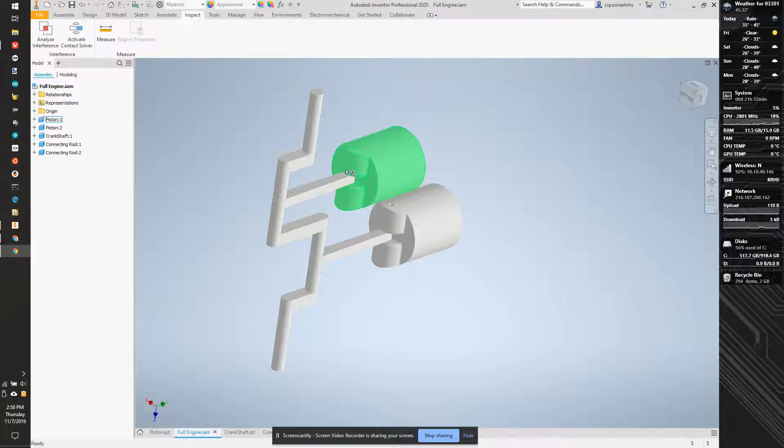So I deleted the crankcase, because once you make a part that's derived on another part, the assembly will no longer move, even if you delete the constraints locking it in place. So I can now delete that constraint I mentioned before, and let's place the crankcase back in.

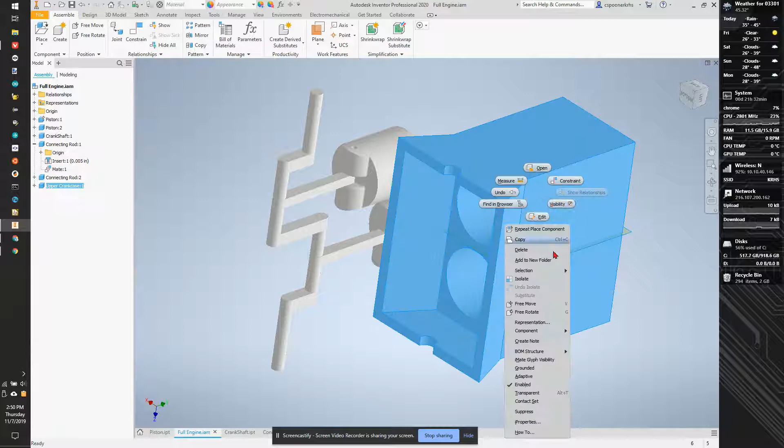I'm now going to ground this piece because it's really the part that doesn't move. I can unground the piston. And now the trick here is not grounding, not locking too much. I know for a fact that this rod gets mated to this axis.

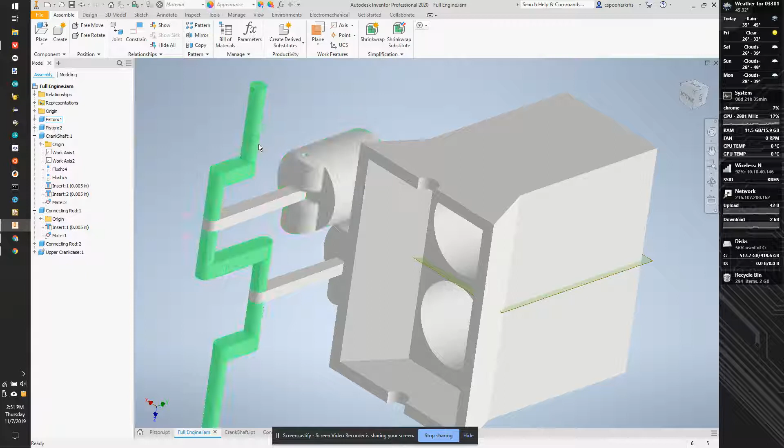Let's try that again. I'm going to mate this axis to the axis of this, and apply.

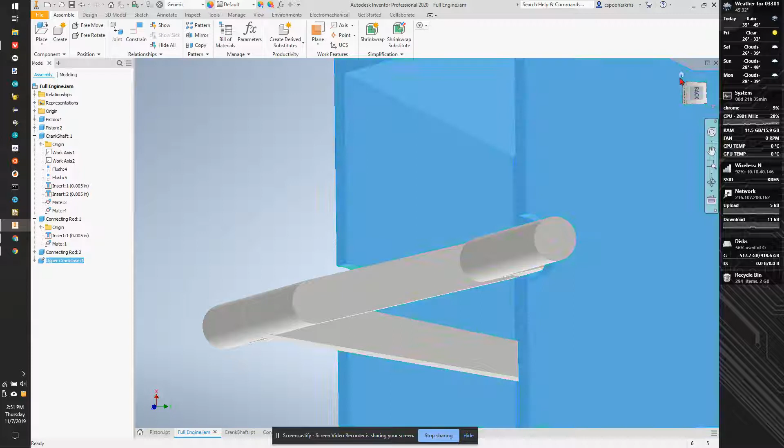Now this can move in and out, but that's going to be taken care of by locking the pistons in place. So I know this piston here gets mated to the cylinder, and we apply that. Now at this point, I should be able to spin the crankshaft and the piston should go up and down, which they do. So we are on our way to having a functioning engine.

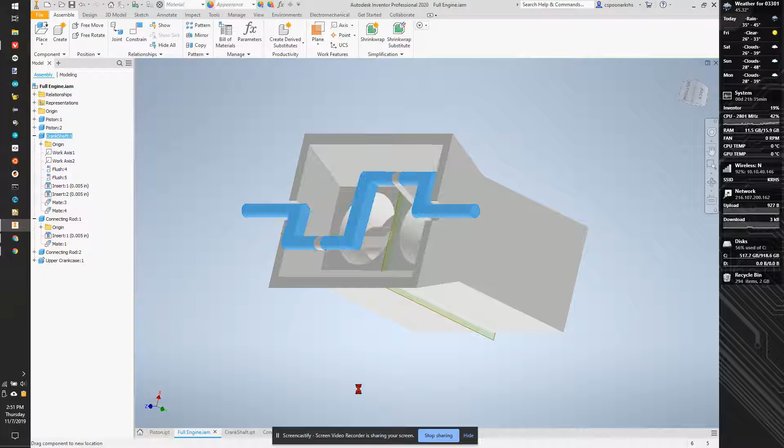Now if I look at the top of the engine while I do that, they come near the top and then come back down. Later we'll make this more complete with valves and all sorts of stuff, but right now that's pretty darn good.

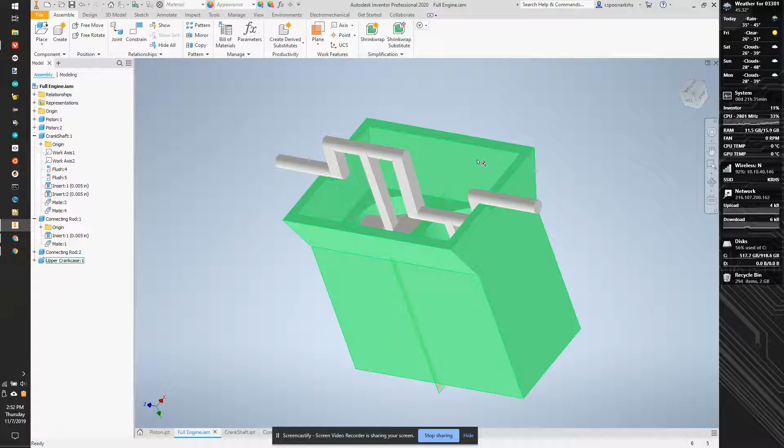Our last step before we can print this version of the engine is to add the lower crankcase and the bolts to hold it together, because we're going to screw the bottom and top together. We'll drop this in and then screw it all together, and that should lock our pieces together.

So I'm going to create a new piece. I'm going to create this also in place. It's going to be called lower crankcase.

And I'm going to start that on the... nope. Let's try that again. Lower crankcase.

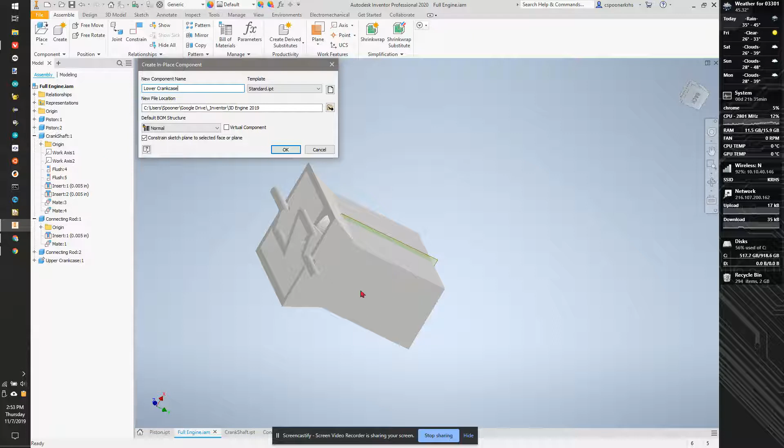Starting on the outside face here. I'm going to pause this for a moment - sorry for that small interruption, but that should sound okay for you guys. If it sounds weird, I apologize, I'll fix it after this video if need be.

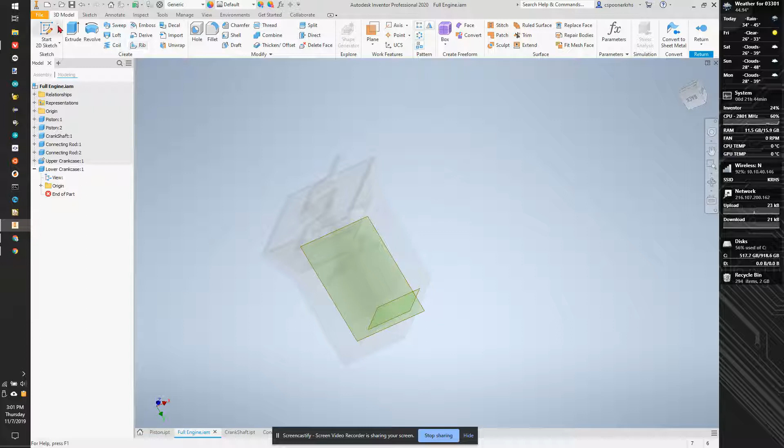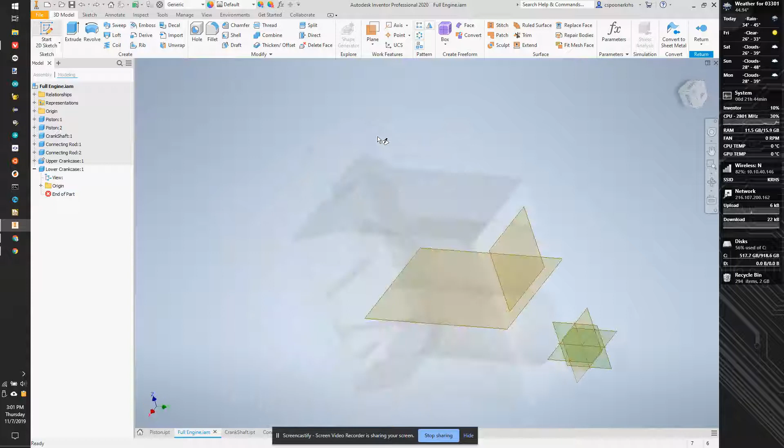So what I'm doing now is creating my lower crankcase, and I'm going to start my first sketch on the outside surface of this thing. Nope, undo. I want to start the sketch... let's undo, start a sketch, and we're going to start a sketch on this plane right here.

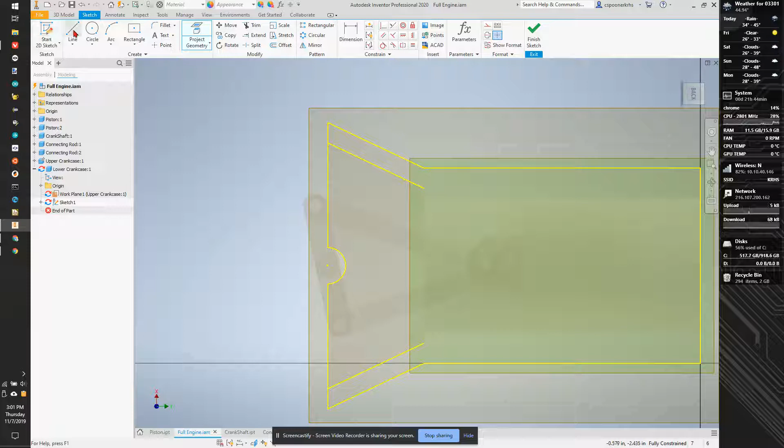I'm going to project the geometry of this surface, and this surface, and this surface, because then we can use that as our starting point. I'm now going to come up this way a little bit, then we're going to come this way, then back this way, and then this one.

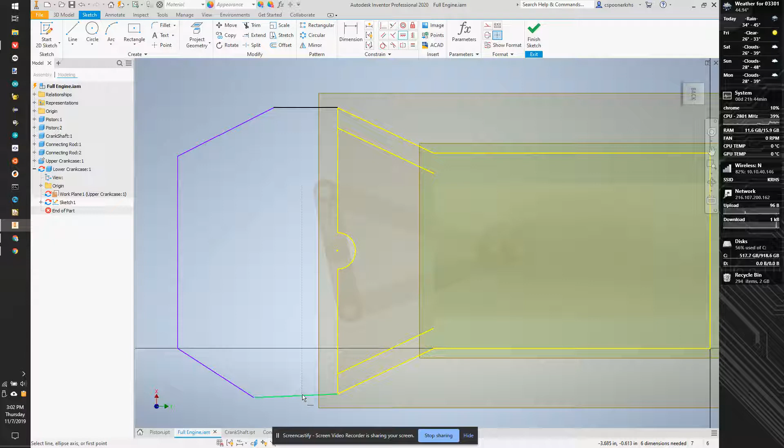I know this is... nope, there we go. I'm going to draw a center line with construction, so I can use the symmetric constraint to get all these things even. So this and this are symmetric about this.

That's weird. All right, so let's dimension stuff. I want this dimension here to be 25 degrees. Now I can try symmetric again - this and this are symmetric about this, this and this are symmetric, and these two are equal.

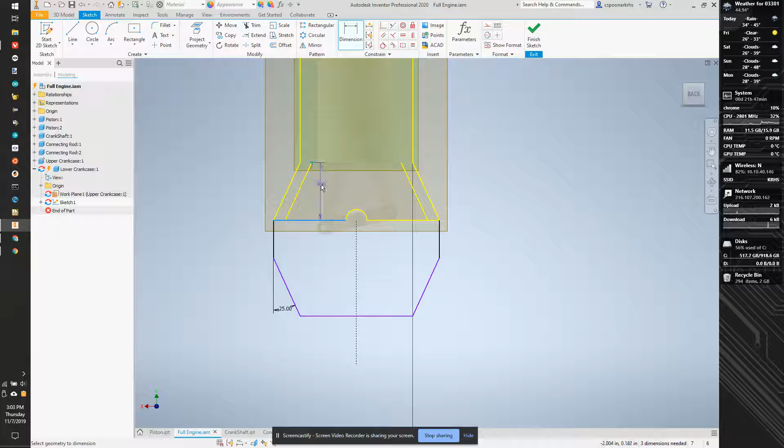And this dimension here, we're going to dimension from here to here, and we're going to dimension this from here to here to be the same value. Then we're going to dimension this wall here to be 0.25.

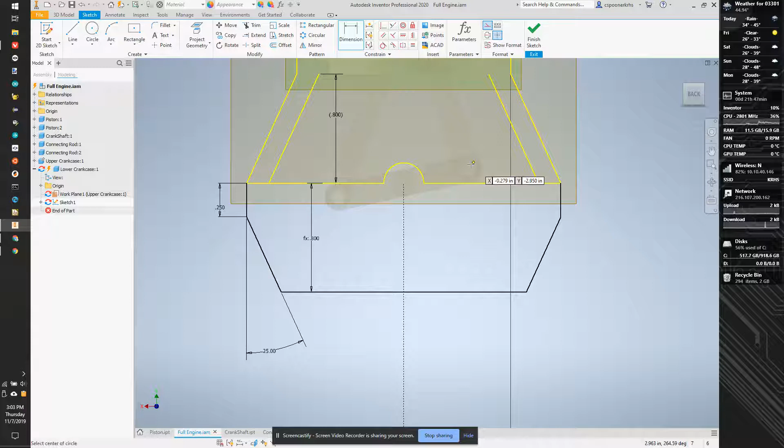That looks good. And now I also need to draw the circle, and this circle should be non-construction. So now I'm going to extrude this thing.

0.1, 0.2 going this way - I want to make sure it's lined up with the other one. Let's try 0.15. There we go.

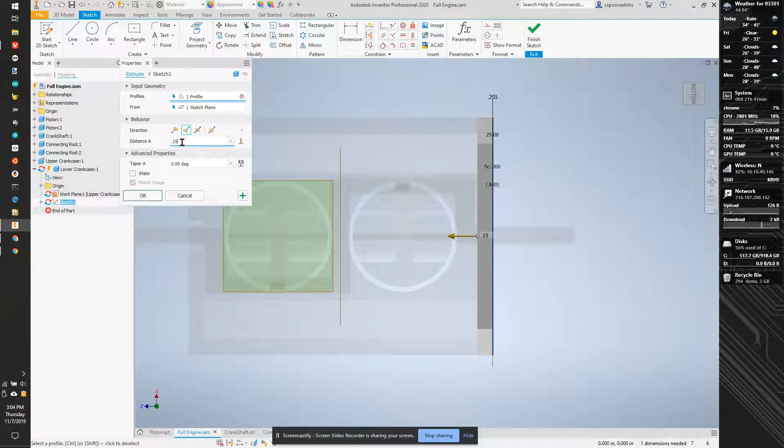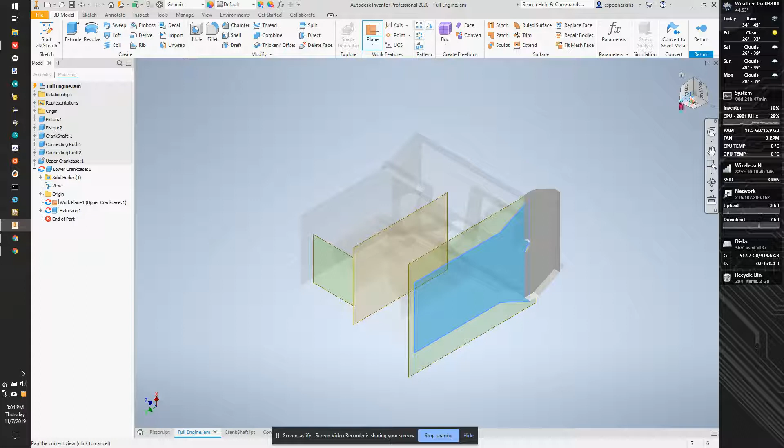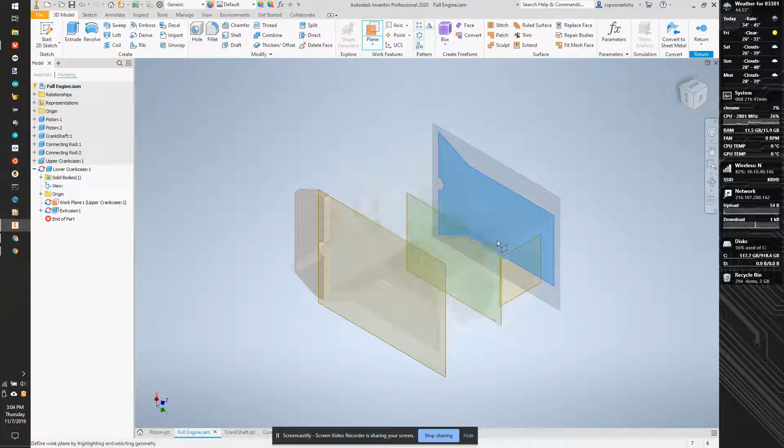I'm going to mirror this feature about the... okay, I'm going to create a work plane from here, create a work plane on this back surface, and then make a mid plane between these two guys. Okay, it's not going to let me do a mid plane, we'll just draw it manually.

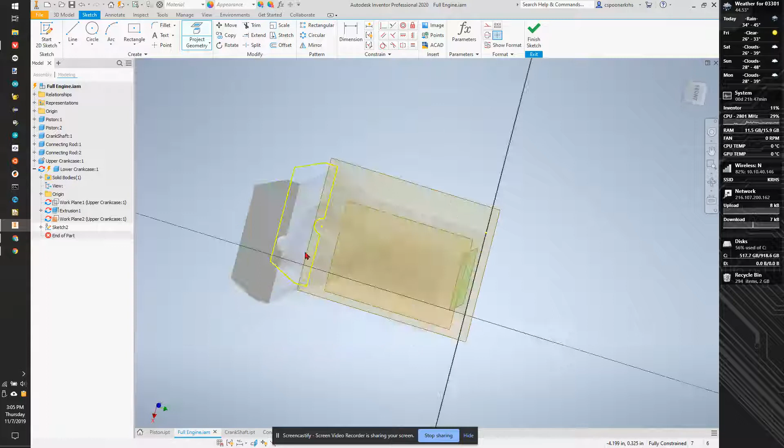So I'm going to start a sketch over here. I'll project geometry, extrude this going in 0.15. And then we're going to start a sketch on this surface, F7, and project geometry.

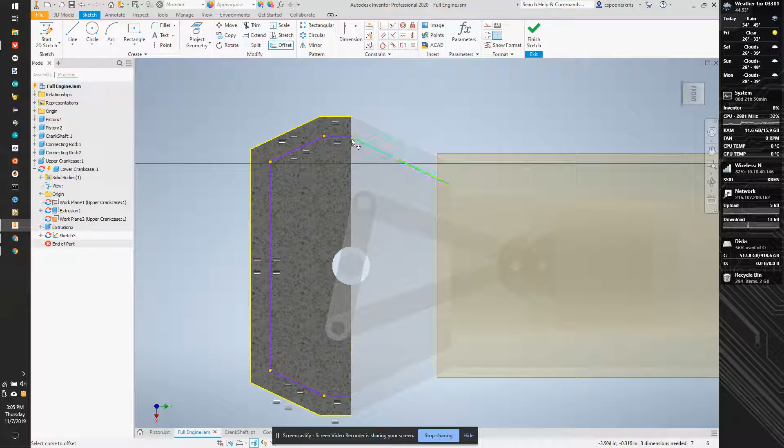I'm going to project this shape - project this edge, this edge, this edge, this edge, and this edge. And we're going to offset, and I'm going to make sure this point touches that point. Try it again - this corner is coincident with this corner. And then we're going to extrude.

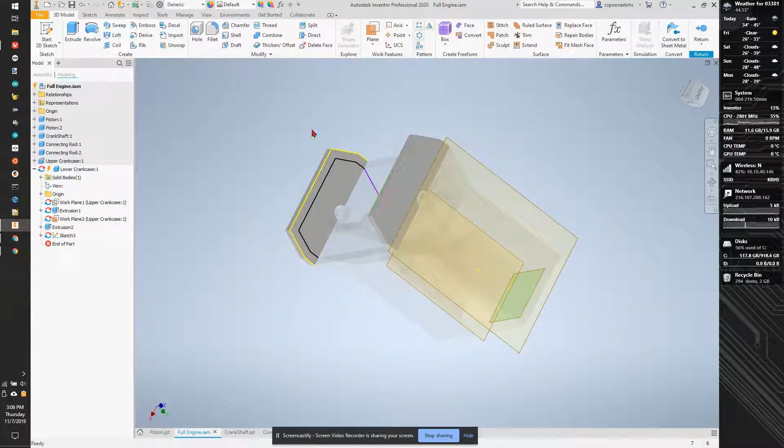Finish sketch, extrude. Oh, when you go into sketch, we add two little lines - let's add the line from here to here, and same thing over here, and make sure that actually closes the geometry.

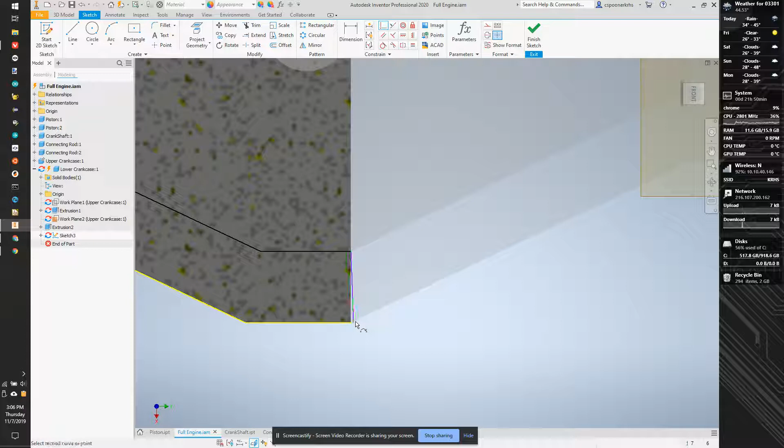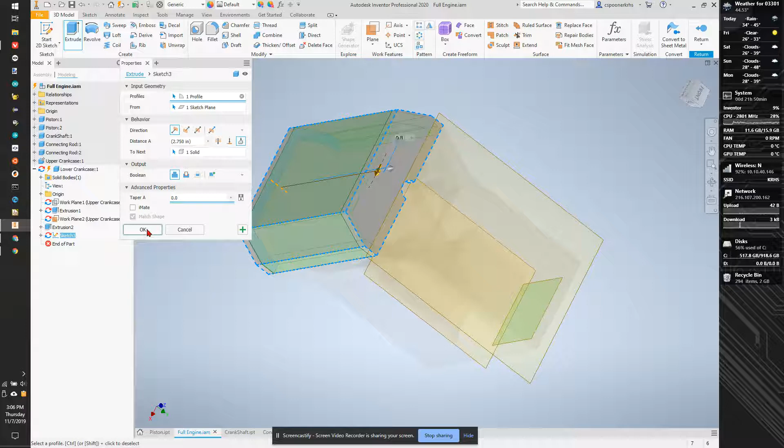Finish sketch, extrude this face to next. And there we go, we have our bottom. So if we return to this shape, we now have a full engine.

Now the last thing we need to do is figure out how we're going to hook these together. What I think we're going to use is a screw coming in through the top of here and going into here, so we need to add some features to this. I'm thinking we're going to screw from the bottom going in. So we're going to start a sketch.

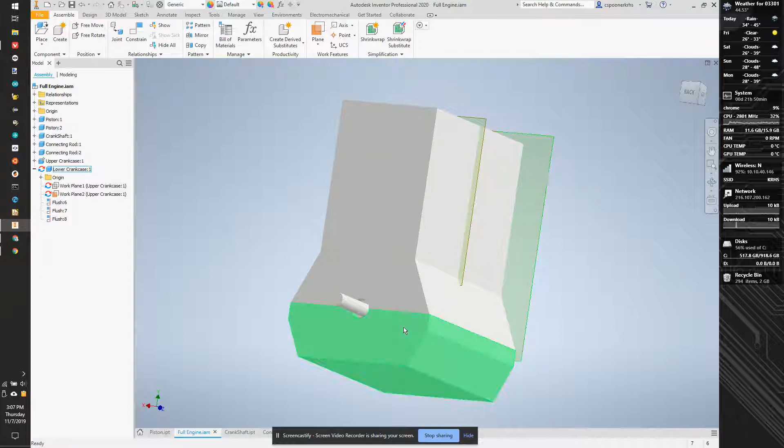We're going to go back into the bottom. I'm going to start a sketch and make a new work plane that goes from this point here. Nope, try again. From this edge over to this edge, 0 degrees... 90 degrees, there we go.

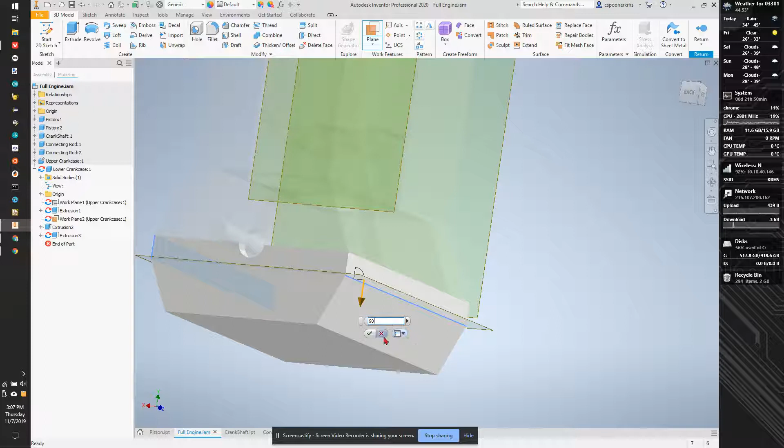I'm now going to start a sketch on this surface here. Finish sketch. Let's jump back out and place a couple of screws in here.

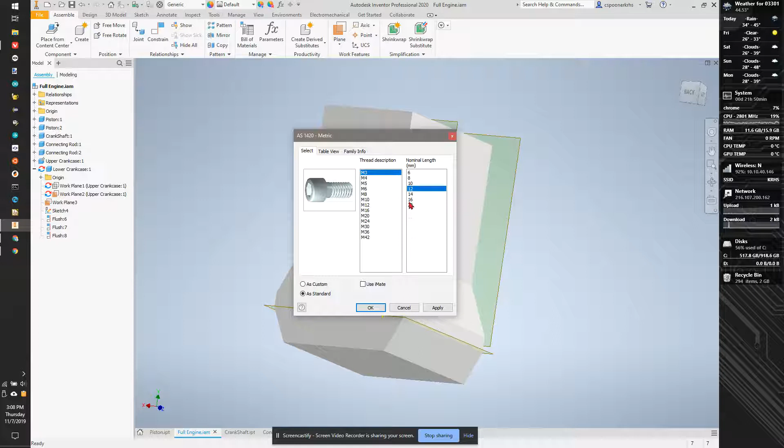So we're going to go to place from component center, from content center, and we're going to add some 3mm screws. I'm going to go metric, socket, and I'm going to go M3 by 12. That should be just over a half inch, or just under a half inch.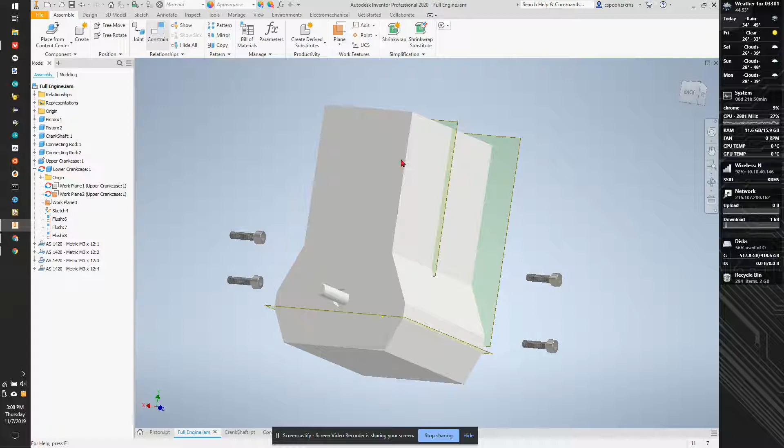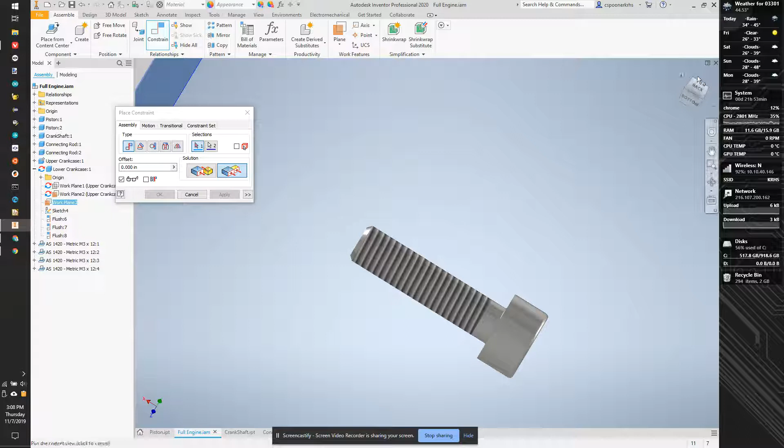And let's assemble these in place. I know that conceptually, this head here is going to be mated to this plane here. And then this is going to go somewhere in here.

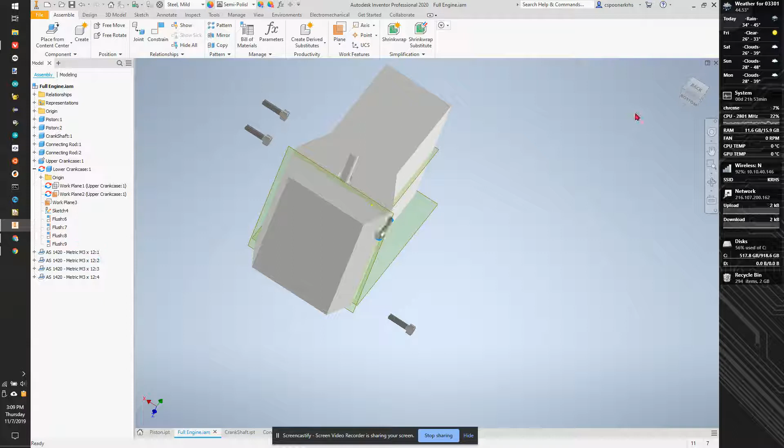And we're going to get this guy sort of lined up where we want it. So I'm going to constrain this plane here, and I'm going to use the screw I've already started with. Nope. That's one, and we're going to mate his origin to negative 0.5.

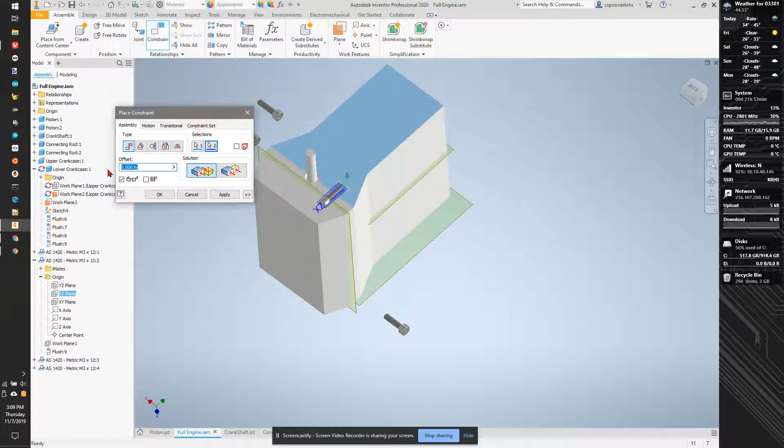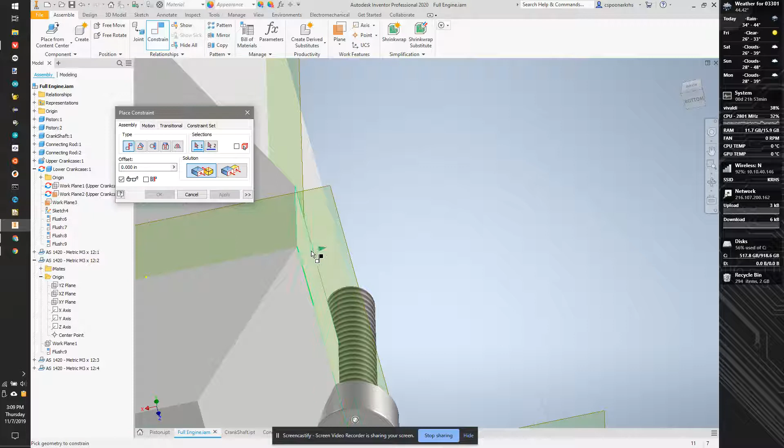Let's see if we can find him again. So let's try this again. Let's move him in first. So constrain, I'm going to mate this surface here to this screw's there, and we're going to submerge it 0.1.

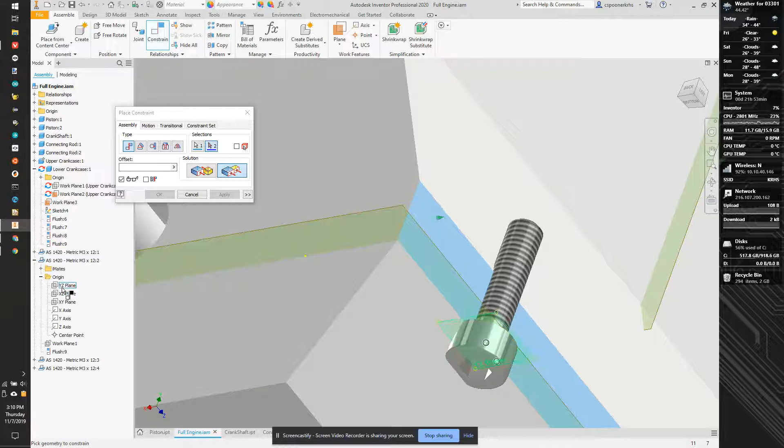Oh, we can get his... point 0.1. And that looks good, he's sort of submerged. He has the screw head, doesn't stick out past the edge of the thing much.

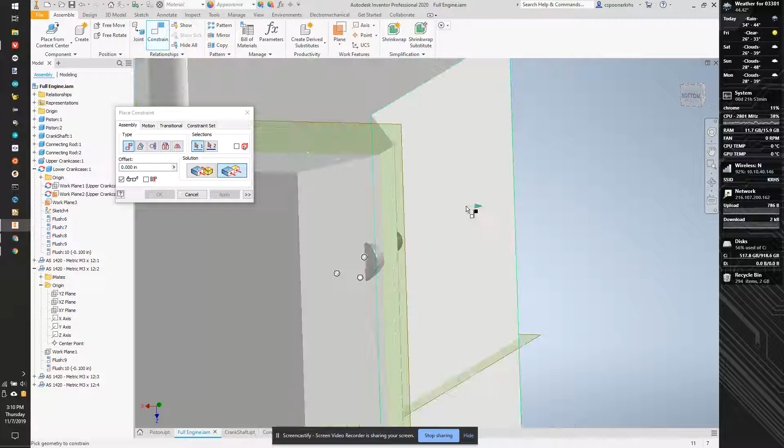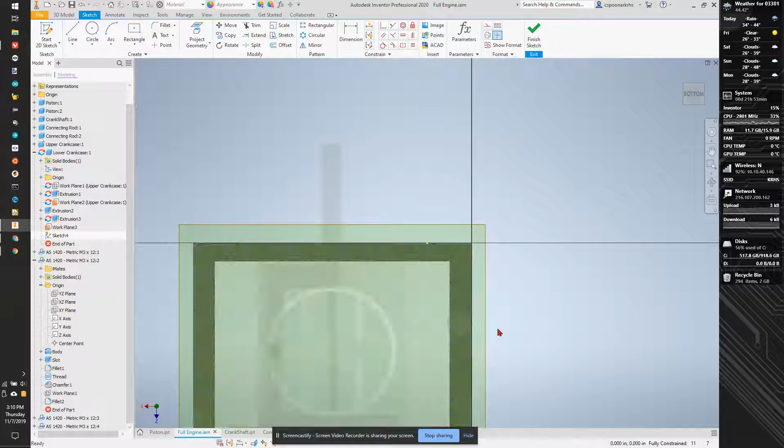That looks good, so let's go back into. Let's go into here. Oh, let's actually take one more thing. Actually we can go right into this part and we can adjust and we'll work off each other. So I'm going to jump into this part, we're going to go into the sketch we'd started. F7, I'm going to project the geometry of the screw. Finish sketch.

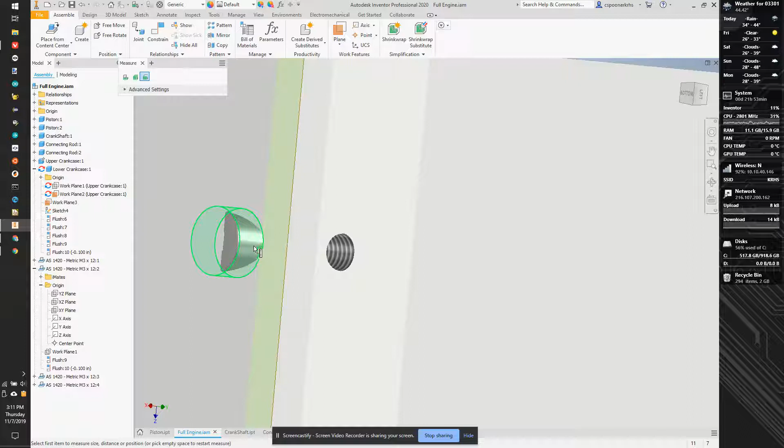Let's return. I'm going to hit measure, M, and this diameter is 0.217. That's really what I need to know. So let's jump to the bottom of this guy again.

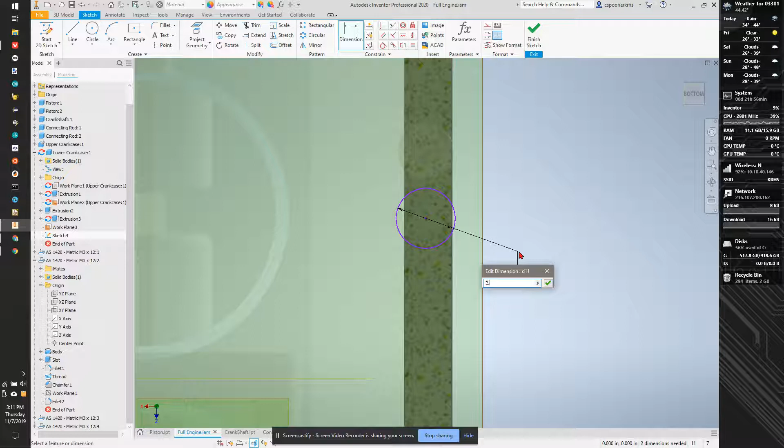F7, and I'm going to draw some circles. And the circle's going to be 0.217 plus 0.01, so 0.217 plus 0.01. That looks better, and I'm going to center this along this axis here.

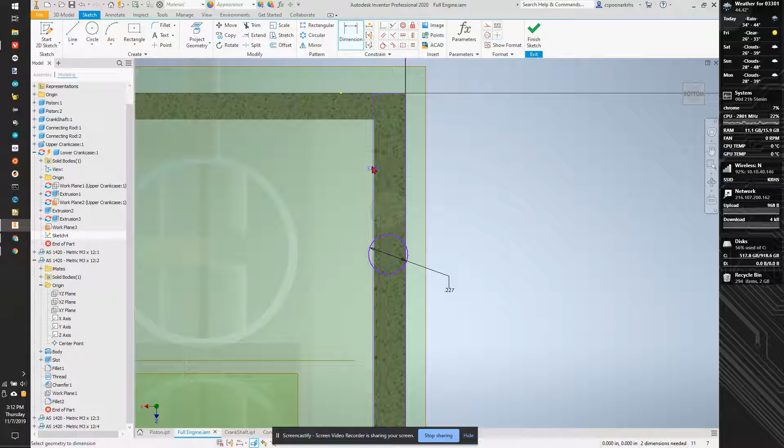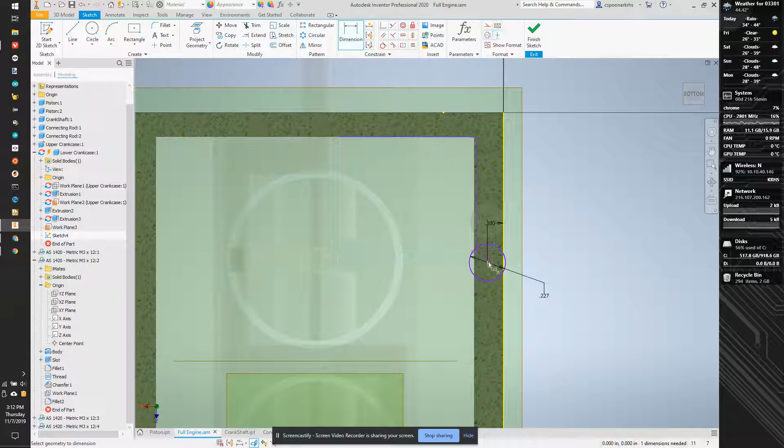So I'm going to dimension from here, project geometry, and we'll just dimension it manually. I know these walls are about 0.26, so 0.1, and let's measure from here to here, it's 0.75.

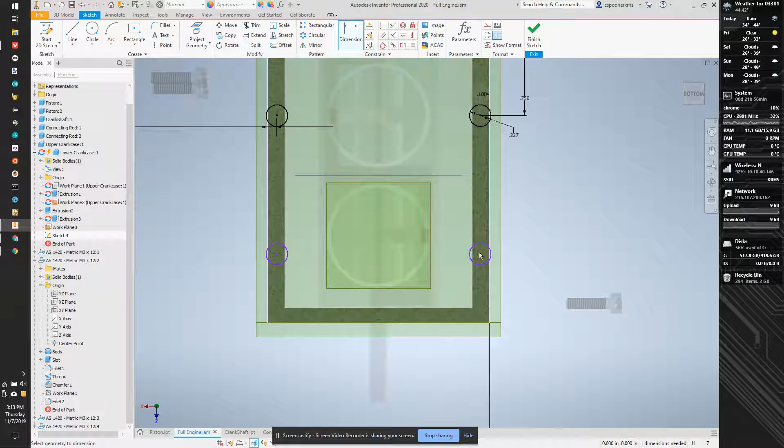And let's draw 4 more circles, we're going to make them all equal to the first one. I'm going to vertical them. Horizontal and vertical are relative to the direction you're looking, so you have to be careful and look at the line. Let's see if those move. Oh, that's fine. We're dimensioning from here to here to be the same number as this is, and we're dimensioning from here to here to be this number. So it gives our 4 screw holes.

I can now extrude, and we're going to go upwards because this is the screw head, and we're going to cut all of it.

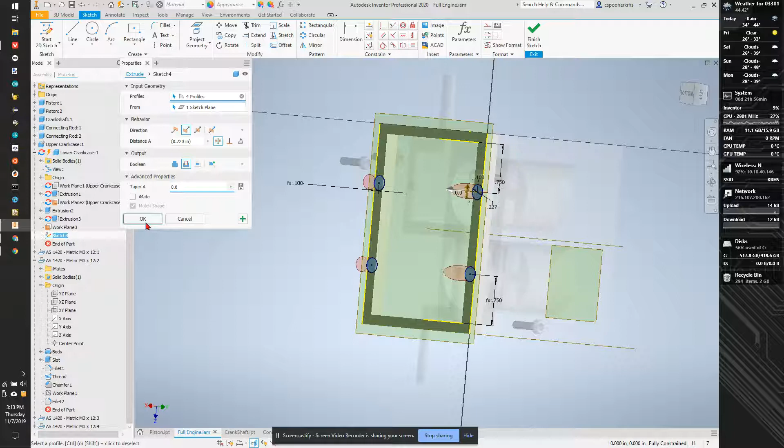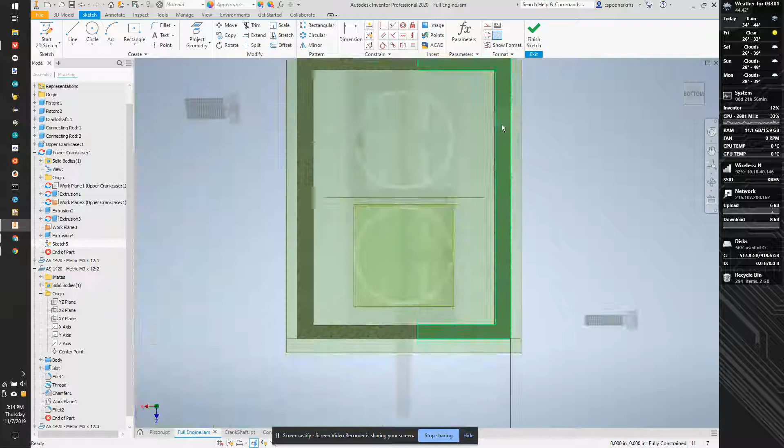Now we still need the screw bottom, so I'm going to start a sketch on the surface thing. Finish sketch. Nope, we can actually go into that sketch. F7, project geometry first, and we're going to draw circles concentric with those.

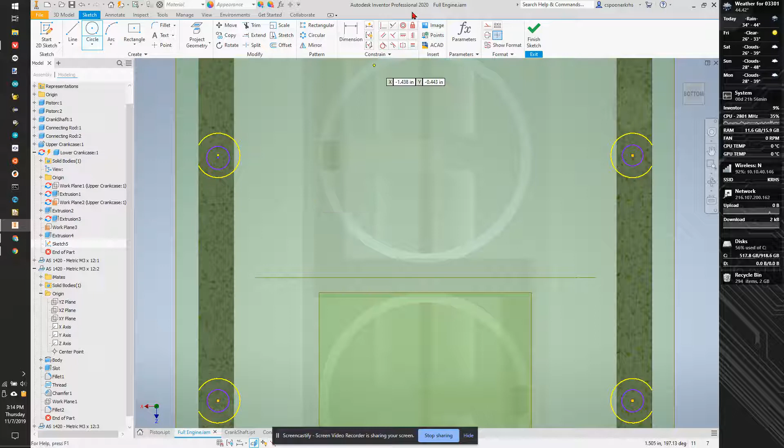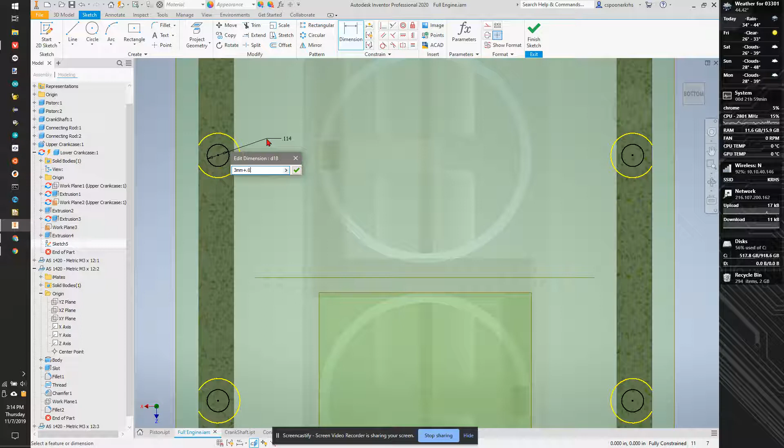And I missed this one, so I'm going to use a connected point, and we're going to set this dimension, they're all going to be equal to each other. And we're going to dimension this thing to be 3mm plus 0.2, distance all.

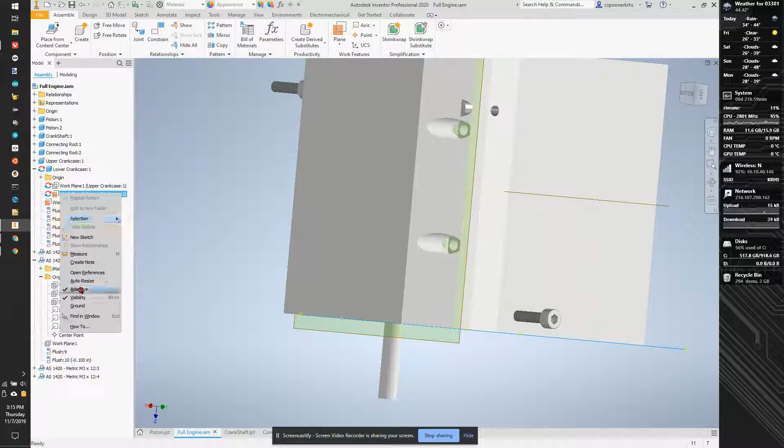Okay, if I return back here, I'm going to turn off the work planes so I don't see them because they're ugly. Visibility, visibility, same up here, let's turn off.

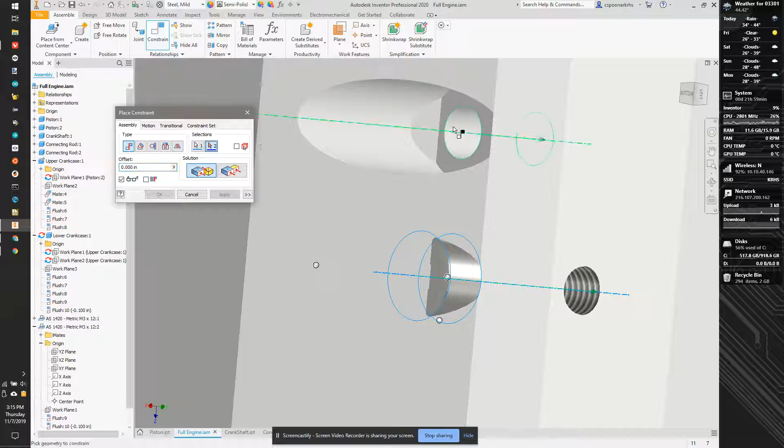Now this guy, we can now constrain and just make the axis of this to the axis of, nope. And that's all 3 of these. And I can use insert, the bottom of the screw to that spot there.

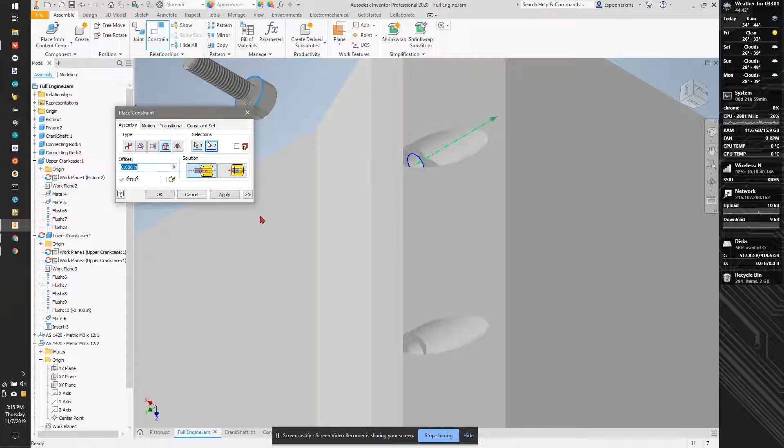So there is our crankcase. The last step is going to be making the spots for the screws, the nuts, and we're going to use a captive square nut for this. And we'll do that in the next video.